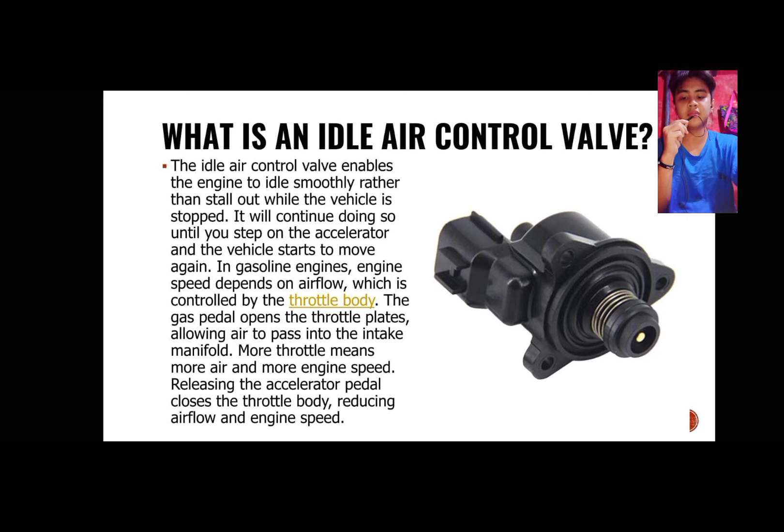In gasoline engines, engine speed depends on airflow, which is controlled by the throttle body. The gas pedal opens the throttle plates, allowing air to pass into the intake manifold. More throttle means more air and more engine speed. Releasing the accelerator pedal closes the throttle body, reducing the airflow and the engine speed.

So now we will talk about its purpose. Purpose of idle air control valve: it regulates the amount of air flowing to the engine. When the engine is idling, having the right idling speed is vital to the economy and safety of the parts of the engine.

While starting the car, a cold engine will require more air to idle smoothly. Also, when you step on the gas and then let off, the air supply to the engine ceases. But to ensure the engine doesn't jerk to a halt, a little air has to be supplied to the engine.

From the above-mentioned instances, it is clear that regulating air supply is vital for the smooth running of the engine. At the same time, the amount of air that enters your car's engine should be kept under check, else the engine will have more air than fuel, hypothetically. This is where the idle air control valve enters the picture.

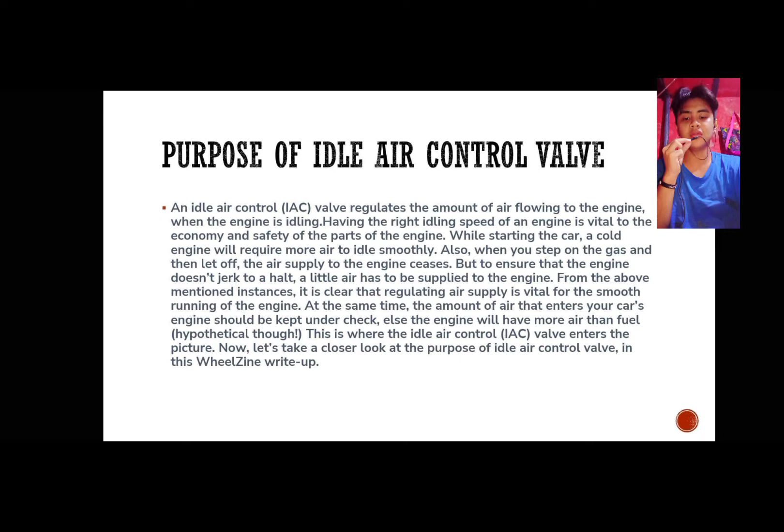Now let's take a closer look at the purpose of the idle air control valve. It is an essential part of the vehicle engine management system, integrated into a bypass housing or located on or near the throttle body assembly.

The idle air control valve allows a measured amount of air to bypass the throttle plate or butterfly when it's closed, enabling the ECU to accurately control the idle speed of the vehicle's engine.

The IAC position is adjusted quickly to compensate for engine load, commonly required during engine startup, cold start engine or warm-up, additional electrical loads, deceleration, air conditioning, and automatic transmission use.

The IAC valve is controlled by an input signal from the ECU as required by the engine management system. The duration and frequency of the ECU input signal determines how long and how far the IAC valve opens, hence the amount of air that is allowed to bypass the throttle plate.

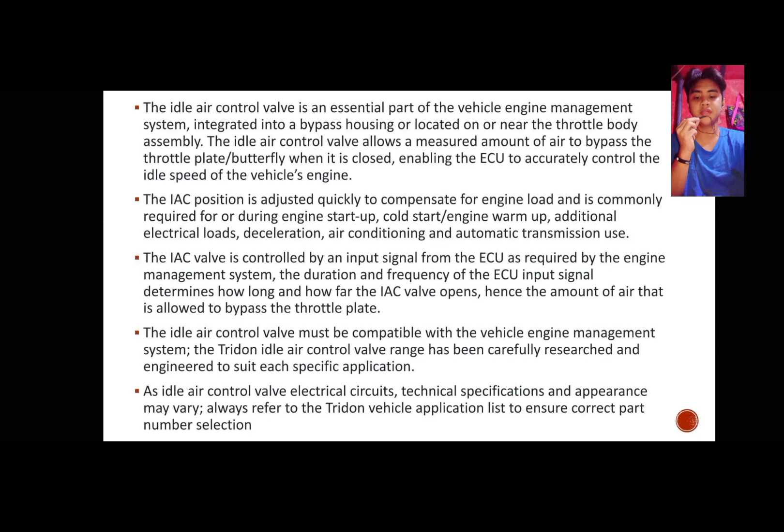The idle air control valve must be compatible with the vehicle engine management system. The Tridon idle air control valve range has been carefully researched and engineered to suit each specific application, as idle air control valve electrical circuits, technical specifications and appearance may vary. Always refer to the Tridon vehicle application list to ensure correct part number selection.

Let's get down to the operation of the idle air control valve. It is controlled by the Engine Control Module, or ECM.

The ECM is the monitoring module or computer of the car that keeps a check on the engine idle speed. The ECM uses the idle air control valve to control the amount of air that is allowed to bypass the throttle intake plate so as to keep the engine idle speed constant.

There are two idle settings on a vehicle: the minimum idle setting is done at the time of manufacturing itself, which allows a certain amount of air to pass through the valve irrespective of the idle air control valve position. The running idle setting is achieved by the combination of idle air control valve position and airflow.

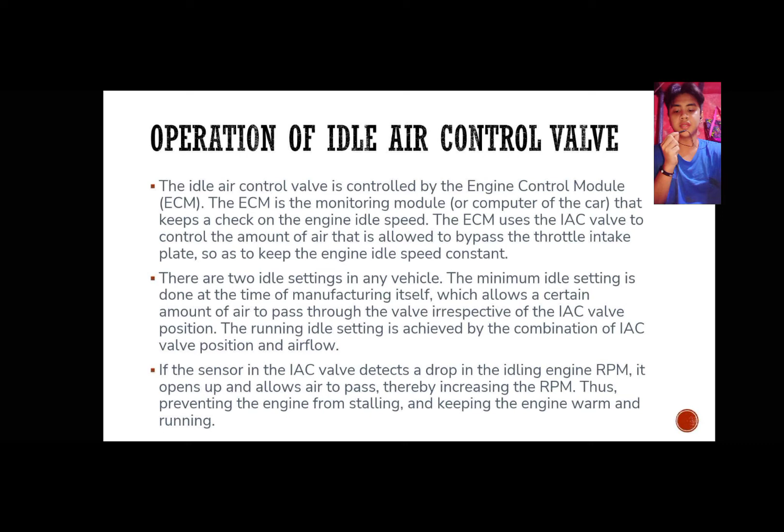If the sensor in the idle air control valve detects a drop in the idling engine RPM, it opens up and allows air to pass, thereby increasing the RPM, thus preventing the engine from stalling and keeping the engine warm and running. An idle air control valve contains a small stepping motor that advances and retracts the pintle valve.

This regulates the amount of air bypassing the butterfly valve in the throttle body. The fuel injection computer ECU adjusts the valve to supply the proper amount of air to maintain an appropriate idle RPM.

To control the idle speed of an engine, an idle air control valve mechanism can be used to control the amount of air that bypasses the throttle valve. This mechanism is commonly used on vehicles with fuel injection which have no throttle valve control motor, like a throttle valve control DC motor or throttle valve position stepper motor.

Two different idle air control valves are found: with a single solenoid or with double solenoids, having a 2-pin connection or a 3-pin connection respectively. Both idle air control valves are mechanically similar in construction. The double solenoid valve uses one solenoid for opening and one solenoid for closing the valve.

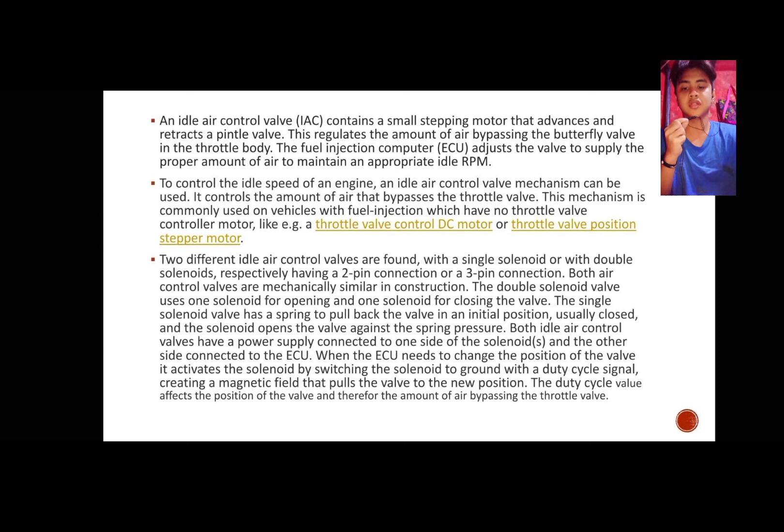The engine runs by burning fuel and air inside the cylinders. When you press on the gas pedal, the car's engine control unit, the ECU, opens the throttle body to allow more air to enter the engine. Meanwhile, the fuel injectors squirt more fuel into the engine. More fuel and air means you get more power.

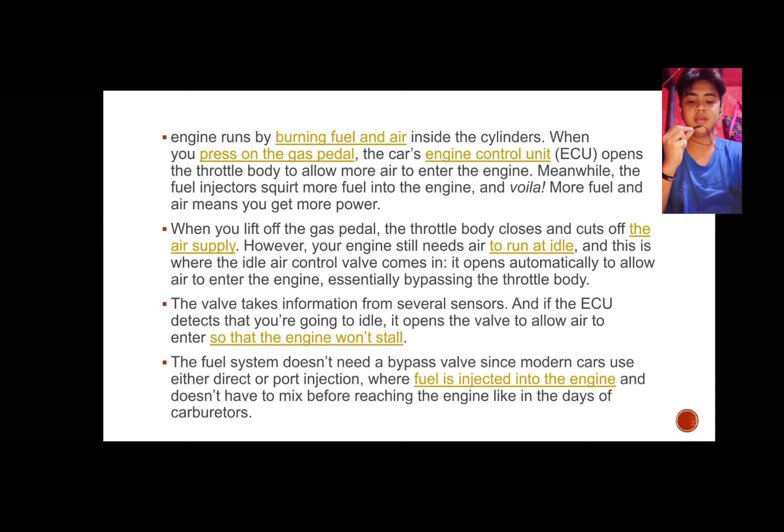When you lift up the gas pedal, the throttle body closes and cuts off the air supply. However, your engine still needs air to run at idle, and this is where the idle air control valve comes in. It opens automatically to allow air to enter the engine, essentially bypassing the throttle body. The valve takes information from several sensors, and if the ECU detects that you're going to idle, it opens the valve to allow air in so the engine won't stall. The fuel system doesn't need the bypass valve since modern cars use either direct or port injection, where fuel is injected into the engine and doesn't have to mix before reaching the engine like in the days of carburetors.

Now let's talk about the construction of the idle air control valve. It is located on the throttle body, and intake air bypassing the throttle valve passes through it. In this way, the intake air volume bypassing the throttle valve is regulated, controlling the engine speed. The ECM operates only the idle air control valve, which receives its power from the EFI relay and ground through the ECM.

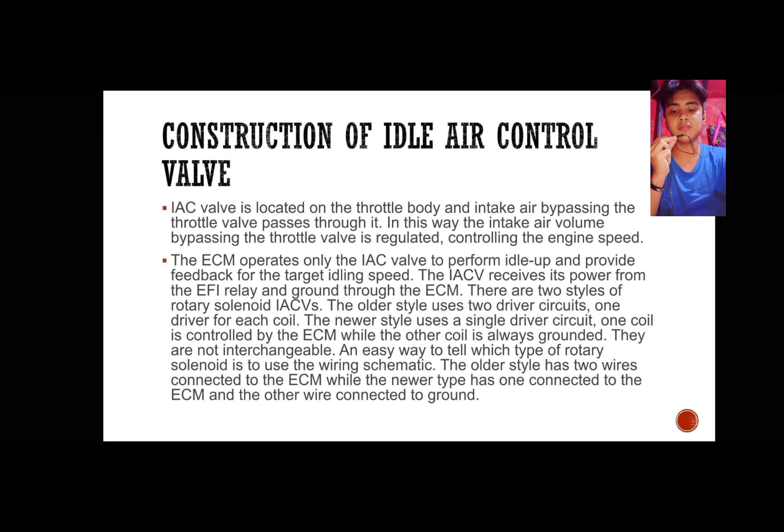There are two styles of rotary solenoid idle air control valves. The older style uses two driver circuits, one driver for each coil. The newer style uses a single driver circuit, where one coil is controlled by the ECM while the other coil is always grounded. They are not interchangeable. An easy way to tell which type it is is to check the wiring schematic. The older style has two wires connected to the ECM, while the newer type has one wire connected to the ECM and the other wire connected to the ground.

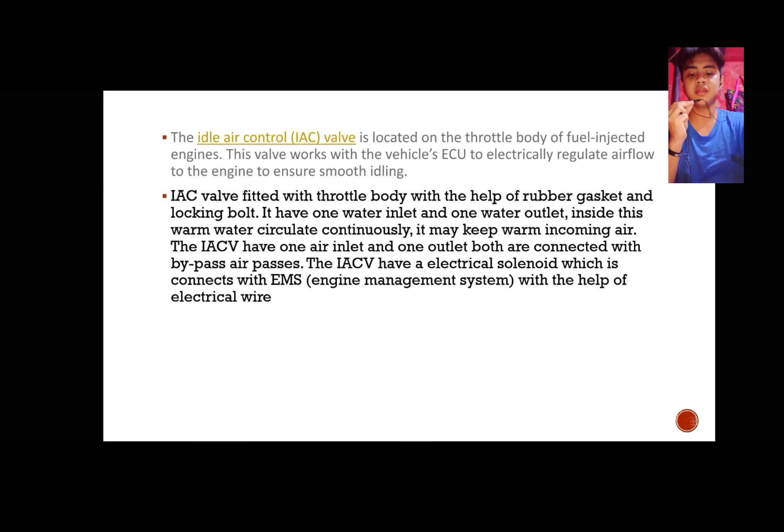The idle air control valve is fitted to the throttle body with the help of a rubber gasket and locking bolt. It has one water inlet and one water outlet; inside, warm water circulates continuously to keep the incoming air warm. The idle air control valve also has one air inlet and one outlet, both connected with bypass air passages. It has an electrical solenoid which connects with the engine management system (EMS) with the help of electrical wire.

Why are idle air control valves important? At idle, a fixed orifice or throttle plate opening might cause fuel-injected engines to stall if power steering or air conditioning loaded the engine. So a variable idle control was needed. Computer controls and electronic fuel injection made efficient and responsive idle control easier to achieve.

Motorized or electronic idle air control valves can open or close the bypass by varying degrees depending on engine load. For example, with no load, the idle air control valve might open only a little. During parking maneuvers, power steering or electrical load slows the engine, but the idle air control valve, using feedback from the engine speed sensor, opens a bit more to provide consistent engine speed and enough power to prevent stalling.

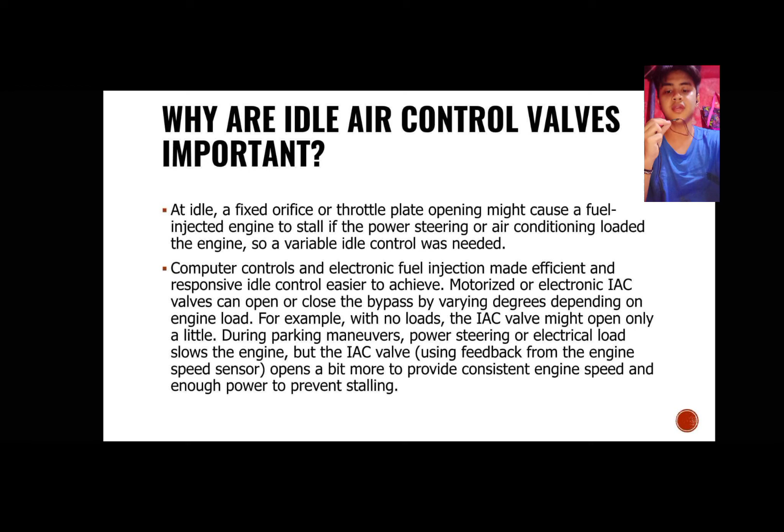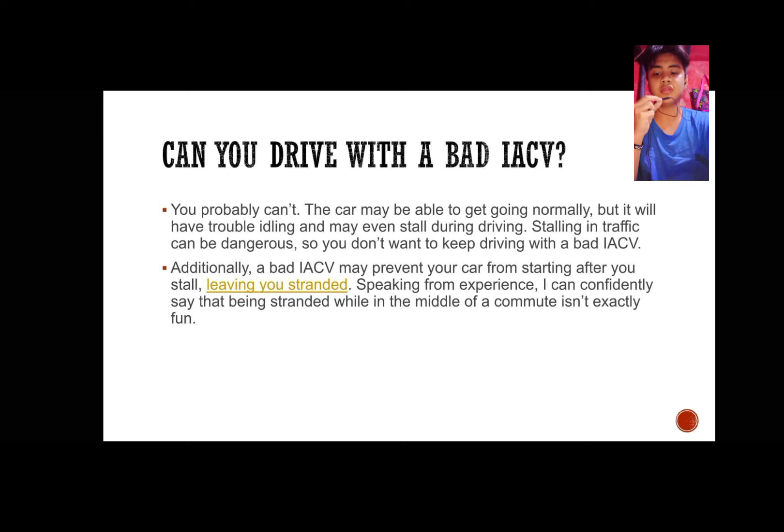Can you drive with a bad idle air control valve? You probably can't. The car may be able to get going normally, but it will have trouble idling and may even stall during driving. Stalling in traffic can be dangerous, so you don't want to keep driving with a bad idle air control valve. Additionally, a bad IACV may prevent your car from starting after it stalls, leaving you stranded. Speaking from experience, I can confidently say that being stranded in the middle of a commute isn't exactly fun.

How long does an idle air control valve last? It doesn't have a service or replacement interval. It may last up to 10 years, or it may fail as early as 3 years. There's really no telling, so replace it when you need to. You can clean it as frequently as you like. In most cases, you can go up to 3 or even 5 years without cleaning it. If you like, you can clean it once a year as part of a major service. The general rule is to clean it if you're experiencing idling problems.